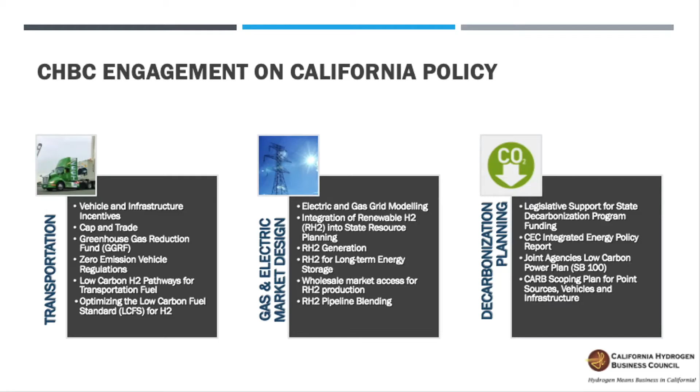So I've been asked today to provide a perspective from California. We've been very engaged in the hydrogen space for a long time now, with quite a bit of experience, and I'll share information on where folks in New Jersey could potentially take your hydrogen studies or policies to help advance the industry within the state. A couple areas we focus on: transportation, gas and electric market design, and statewide decarbonization planning — all areas where folks in this industry could participate with policymakers to move this industry forward. Let's go to the next slide please, Nicholas.

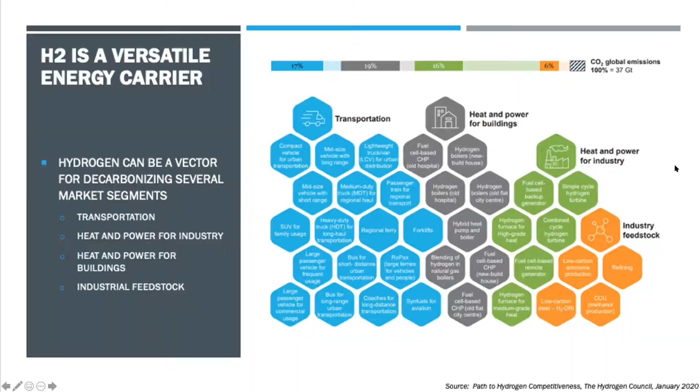I'm going to touch a bit on the gas sector. I won't touch too much on transportation - the other speakers have already touched on that. But we do have very aggressive goals across the spectrum, much like New Jersey with a renewable portfolio standard. Our goal is to achieve 100% renewable power in that sector by 2045, and we've got a 60% goal by 2030. So we're aggressively moving down this path to get to 100% renewable power with a midterm goal of 60% by 2030. So a lot to be done there, and a lot of applications for hydrogen.

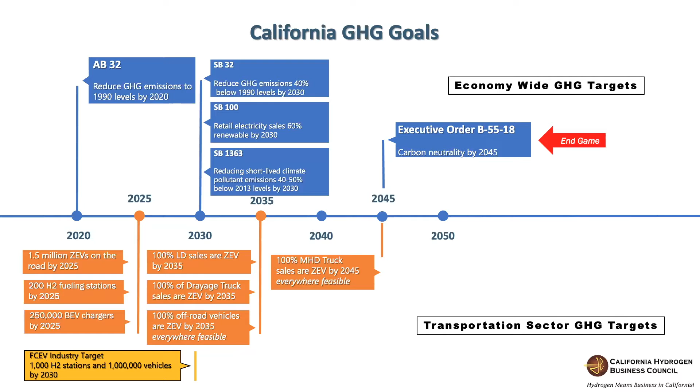On the transportation side, the governor, in case you haven't heard, had set a goal here recently with an executive order to ban the sale of internal combustion cars in the state by 2035 and move to a zero emission platform, and medium and heavy duty trucks by 2045 where feasible. Let's go to the next slide, please.

Natural gas with carbon capture and storage is the band in green. You can see a very low cost option today for green or renewable scale hydrogen. Those costs don't expect to decline much over time, but can still be very competitive with other technologies. And then thermochemical conversion, which is where they think a lot of research can still be done to lower those costs, also presents an interesting and cost-effective option for green hydrogen over time. Next slide, please.

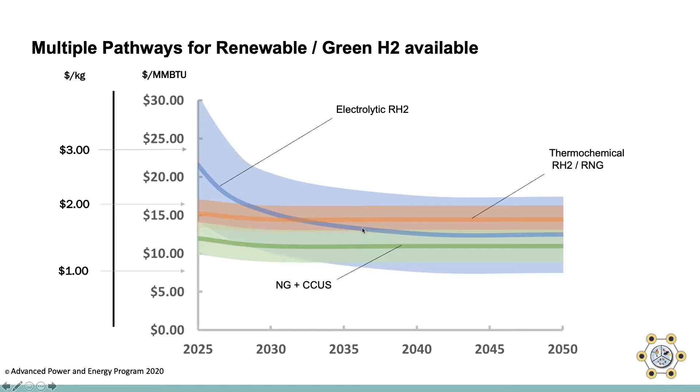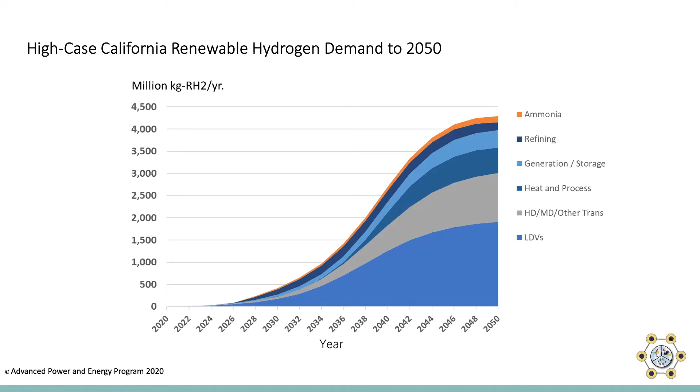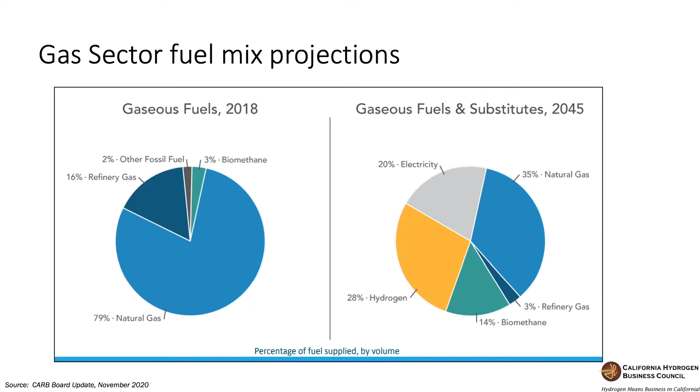So the bottom line for everyone on this call and folks interested in helping promote hydrogen technologies here in New Jersey would be to take a look, from a policy perspective, at what can be done at the state level to help move these programs forward.

A couple of suggestions. One is for the state to develop a high-level strategy. We've seen these be very effective in Europe. California is in the process of developing our high-level strategy now, in what we call a scoping plan. These help align resources across the state to achieve the objectives put forward within those plans, and also provide investor certainty, showing folks looking to invest in this market that the state is serious about it and trying to move forward.

We also recommend that the state take a fuel neutral approach, using an objective carbon intensity metric. Carbon intensity is a measure of the carbon intensity of, in this case, hydrogen, relative to any other energy source participating in the same market. For example, the carbon intensity score in grams per megajoule for diesel fuel is about 100. The carbon intensity for hydrogen produced from steam methane reforming using a landfill biogas feedstock is somewhere in the 70s. So you can take any hydrogen product, whether produced from fossil sources, renewable sources, or anything else, and fit it into a carbon intensity score or matrix that shows how it fits into any regulatory construct. We really like the carbon intensity approach here in California, and it's starting to pick up some steam.

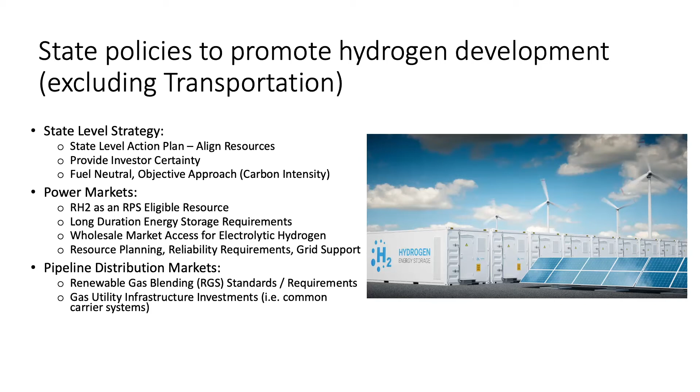Very good. Question, if I may? Sure. What do you see the costs coming down as it relates to the power and gas markets contributing to that downward cost projection?

So a couple things need to happen to start bringing that cost down. Number one, we need to have some scale. The way costs come down is as you start to develop scale, there's competition among suppliers, and as there's additional competition, there's additional innovation, and the cost of the product will come down with increasing scale. The way to get to scale, in my humble opinion, is to get the utilities engaged in the market early and often, and have them start driving that scale with injection standards for renewable gas, in particular hydrogen, and building hydrogen into some of the reliability and long duration storage requirements for the state.

Nice. And one other thing, can you share what policies are being advocated with California policymakers?

All the ones I listed on that previous slide. So we're pushing all of those policies in California to try to drive some scale and investor confidence into that market. Great. Thank you very much.

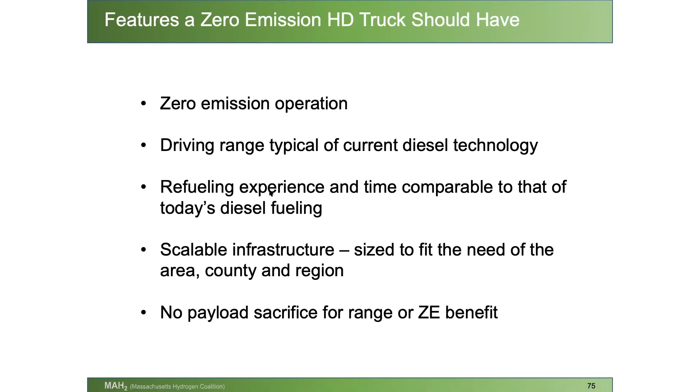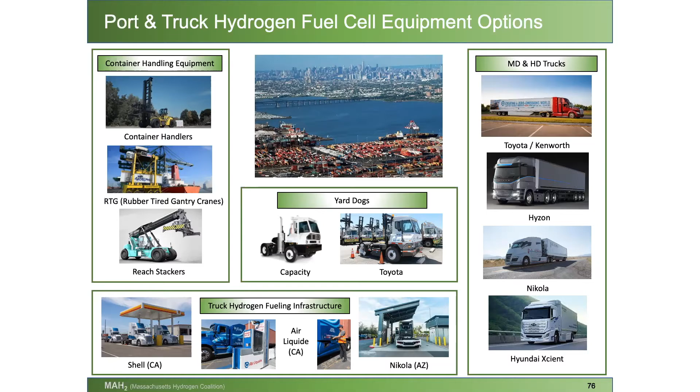It needs to be improved, it needs to be refined. NREL, as we learned earlier, is actually working on getting a higher flow rate through it. But the basics are there today.

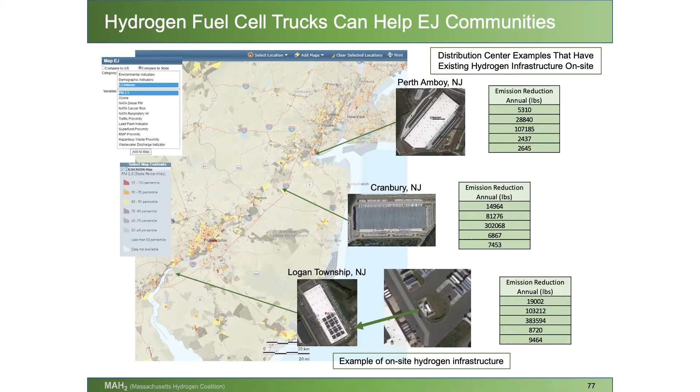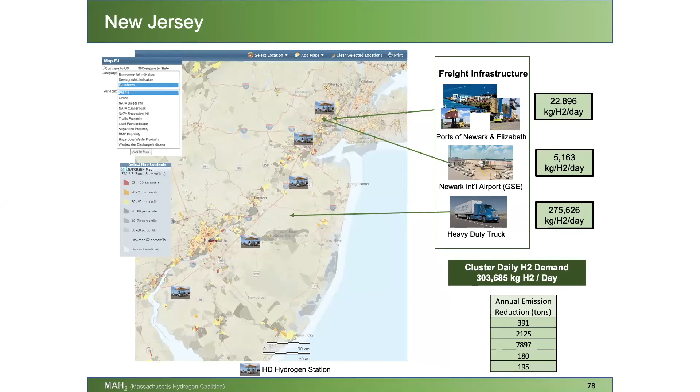2,125 tons of CO would be avoided if all of those vehicles were converted to hydrogen fuel cells. 180 tons a year of particulate 2.5 would be saved, and 195 tons per year of PM10. So it's all very doable, very possible, and there's a health savings and an ability to keep the same performance metrics that businesses are used to in the way they operate today.

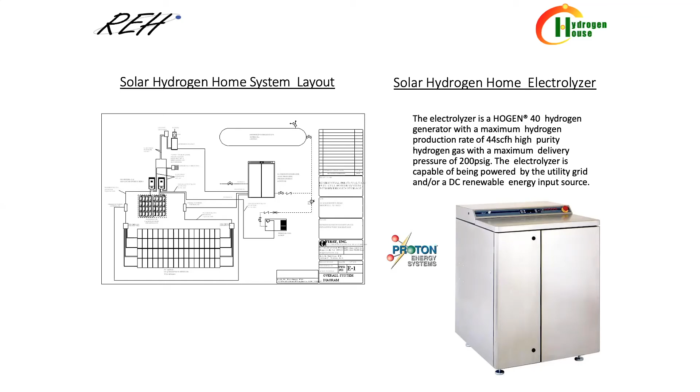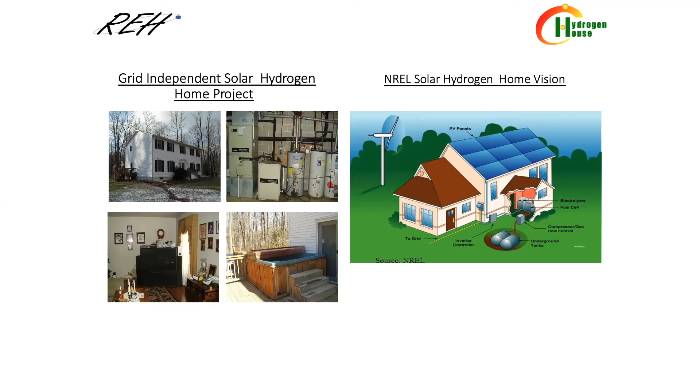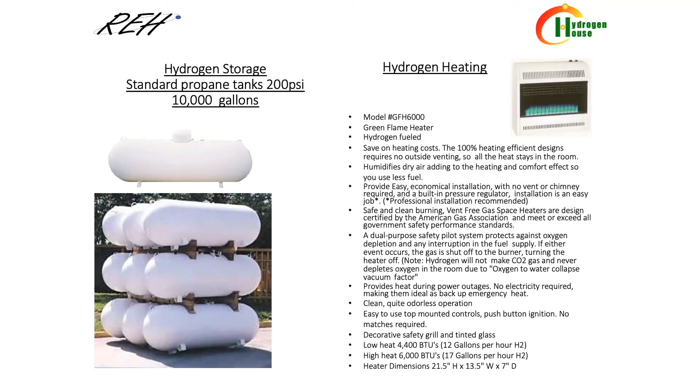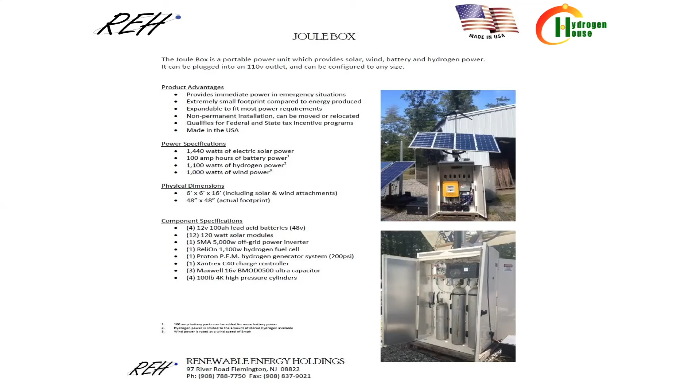Everything here is American made. We've already done hydrogen homes here in New Jersey. I did one up the road in Pennington, which became the world's first commercially affordable solar hydrogen home in the world. That's been operating now for 7 years. I also have one in California as well.

Electrolyzer technology is the key to a lot of this stuff. We've seen that fuel cells, with lots of different companies building them, have come down considerably in cost. We can thank companies like Proton and Toyota for putting a huge effort into bringing these down.

The electrolyzers, on the other hand, that's a different story. Costs have been coming down significantly. The cost for the one at my home was $125,000, and that was a lot of money back in 2002. Currently, the electrolyzer technology we're using is going to do the same thing for about $19,000. So that's a dramatic drop.

Like I said, we've seen the same thing with hydrogen fuel cells, a considerable drop. Right now, there are Toyota Mirais out there that are off lease you can buy for like $10,000. I'm in the business of doing integration and building systems, and right now we've seen a lot lower cost than ever, which is going to make this a lot more feasible very quickly.

Like Charlie said, this is going to be a matter of volume in order to get this out there, and demonstration projects. We have to let people know that there's something else on the menu. We have everything we need. The time is now, and we need to get this thing going and build it.

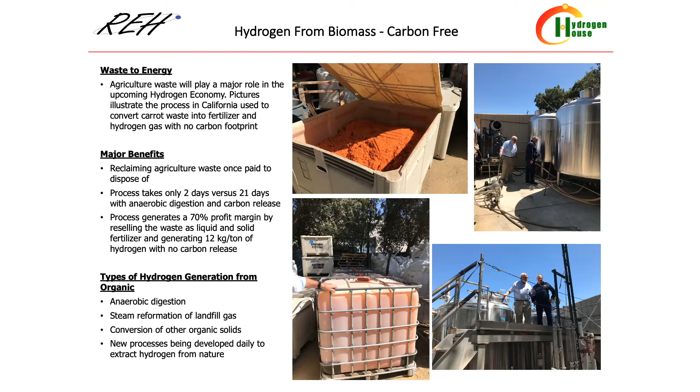Some of the things I want to close out with: currently all the major automakers have invested in this technology, and we have that chicken and egg situation. 94% of all the greenhouse gases can be mitigated by using this technology worldwide, and we have everything that we need. All the technology exists, and advances over the last 20 years are all here today. We've had a false start 10 years ago, but it's all here right now.

All we need is mass production. Right now we're behind the 8 ball as far as what other countries are doing. We have to accelerate that pace. California is probably 6 years ahead of us, and Europe's probably a few more ahead of that.

I'm recommending that we put in incentives like we did for solar originally, so you cover 70% of the hydrogen refueling infrastructure, so we can actually take this seriously and get it out there. Refueling is a real point of contention that needs to happen.

Since we're the most densely populated state in the nation, we can basically put in very few stations, less than a third of what California has, and get twice the coverage. Since we're close to major metropolises like New York and Philadelphia, this makes a lot of sense. So we need to put the funding into education, demonstration projects, and get these stations out there.